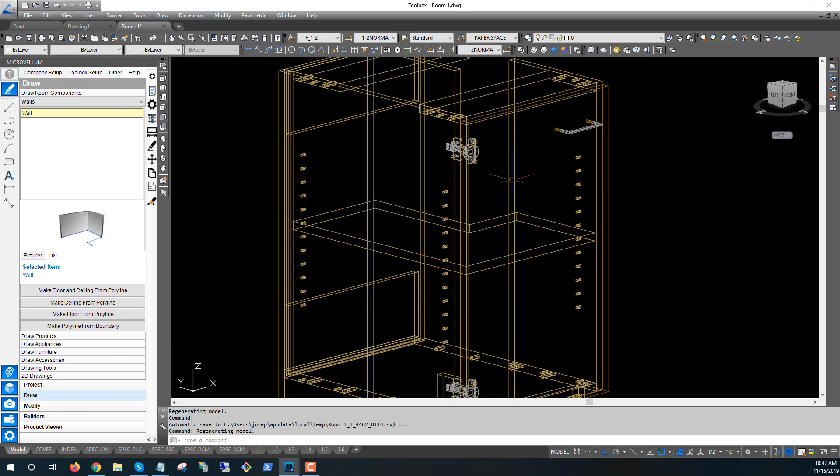I just want to give you a quick demo for people that like to use phantom parts to add shelf clip holes on the side of the cabinet. I want to show you a trick I've been using where you don't have to use a phantom part. Actually, the only time you really have to use a phantom part is when you want shelf clip holes on an angle. So if the surface is perpendicular or parallel to another surface...

So I added another face here, just moved it over 6 inches. I know the rest of the cabinet's wrong, but that's outside the scope of this video. So what we want to do is try and get shelf pin holes on this panel.

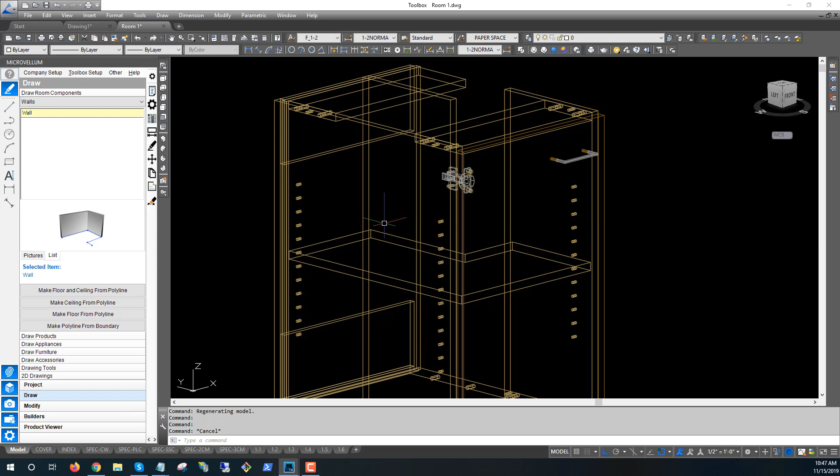So typically what most people do is add a phantom part in here, add the associated machining, and deduct the material, blah blah blah. But you don't have to do it.

Let me just take a peek in the plan. So this here is our shelf. Let me just change that color. Okay, so now you can see I just created another end, moved it over 6 inches, and shortened this one up and shortened that one. So you can see it's kind of making a little box out here.

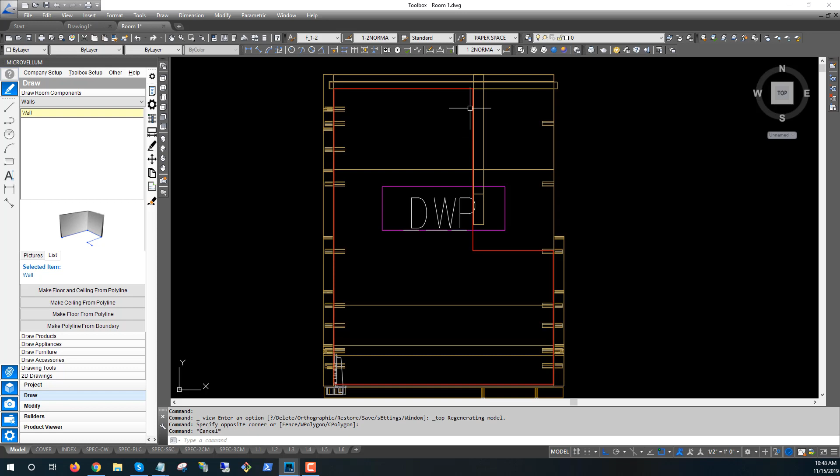So now if I want to put shelf pins here, I'm just going to modify my original shelving unit, okay, here.

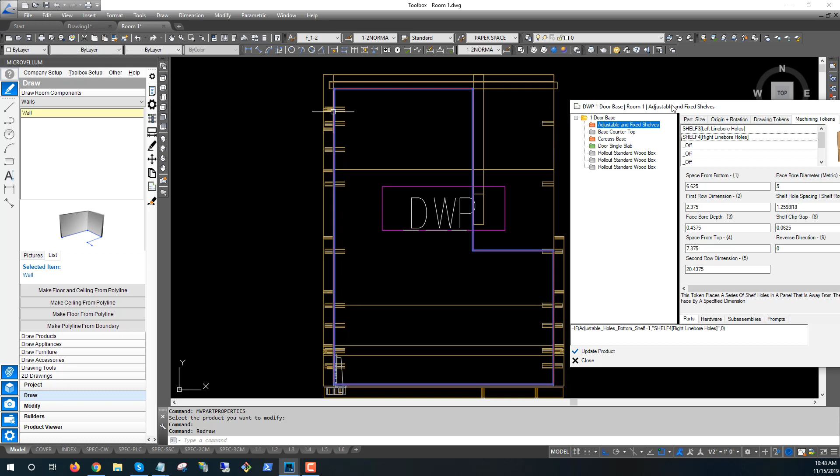So what I did is I copied the right line bore, which is used to do the line boring here, and previously it was back here too. So that copy is living right down here. And you can see shelf clip gap here. It just says shelf clip gap line bore, which is normal.

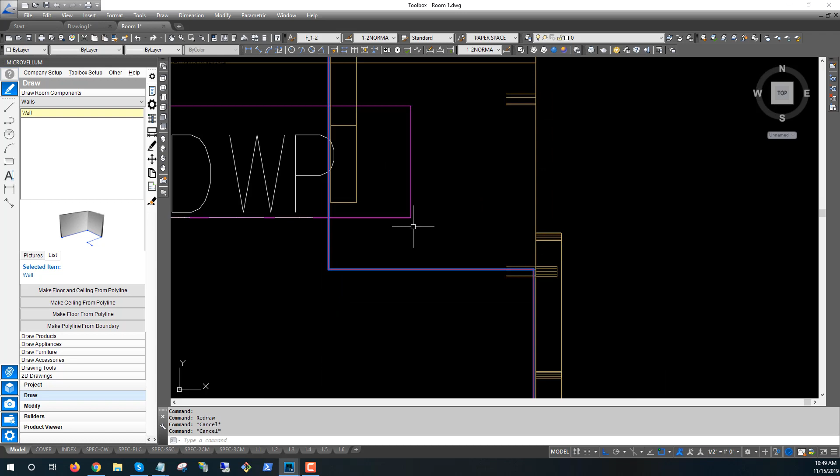Okay, so now to get it on this other face, let me kill that for a minute. What we want to do is put in the number from here to there, from the edge of the shelf to the face of that panel where it's going to live now. So right now it's 5 15/16.

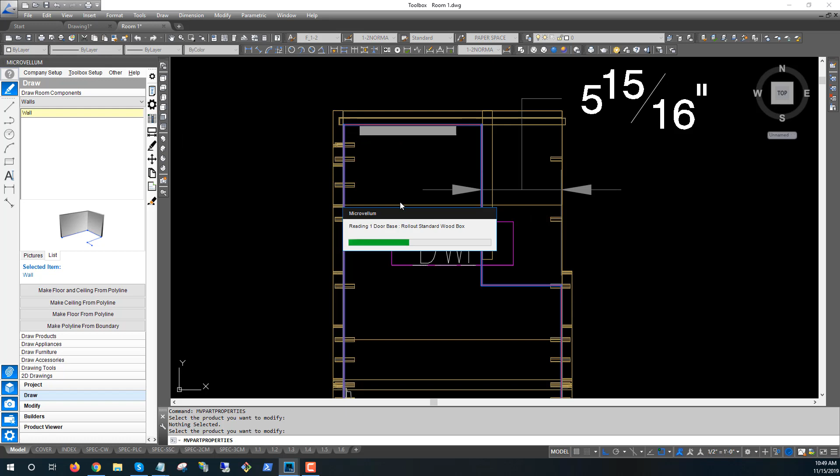Okay, let's get back into our subassembly. We'll go down to our token, and inside the shelf clip gap, since I moved it 6 inches, I'm going to go 6 minus the gap, and make it a negative number since we're going the other way. And you can see that's 5 15/16, exactly what we had here.

So now if I save this, I'm just going to save it as room level. And it's done. There you go.

So no phantom part required. All you have to do is change the shelf clip gap to a negative. Again, that's from the edge of the shelf to that face of the panel. That's the measurement you're putting in there as a negative number. That should save everybody a lot of grief.